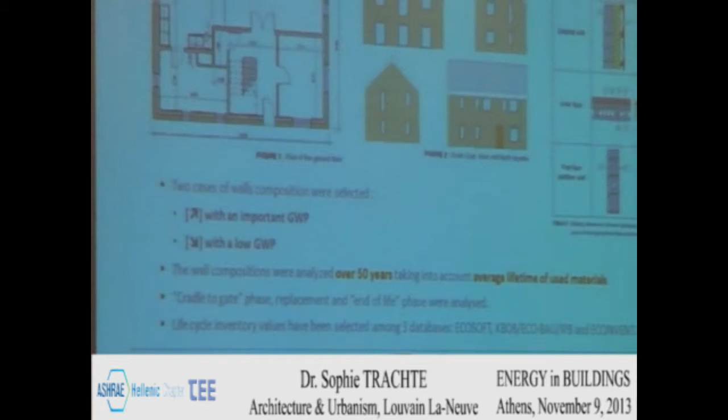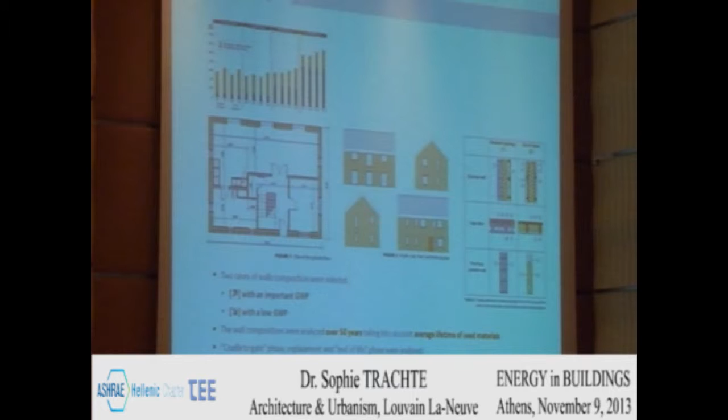So I would like to explain a little bit the graph on the slide. This is the hypothesis: it's just a small study for a single family house with different cases, different typologies, massive typology and wood frame typology, and we try to change different materials in the composition of the wall. So there are 4 different energy performance levels, and you could say directly that when we improve the energy performance of the building, we decrease the energy demand.

But we compare, in the red color, this is the gray energy needed by the building materials to build the house, and in gray it's the operational energy, the energy needed for heating. So we could see that for a low energy standard, gray energy is almost the same as the operational energy, but for a more performant or more efficient standard, the gray energy becomes very important.

So when, as designers, architects or engineers, we work on energy efficiency, it's also important to think about gray energy in building materials and try to decrease this energy consumption.

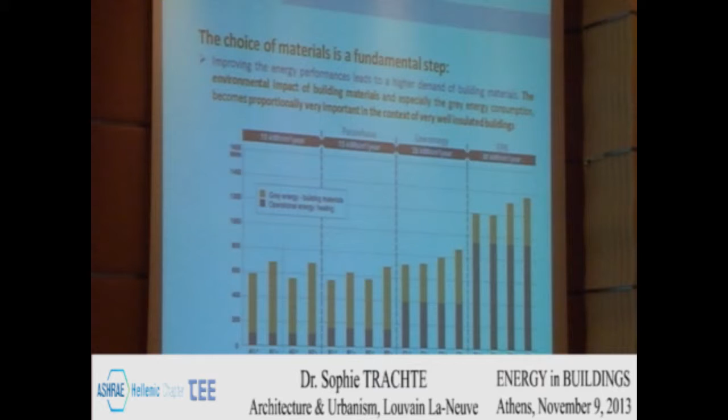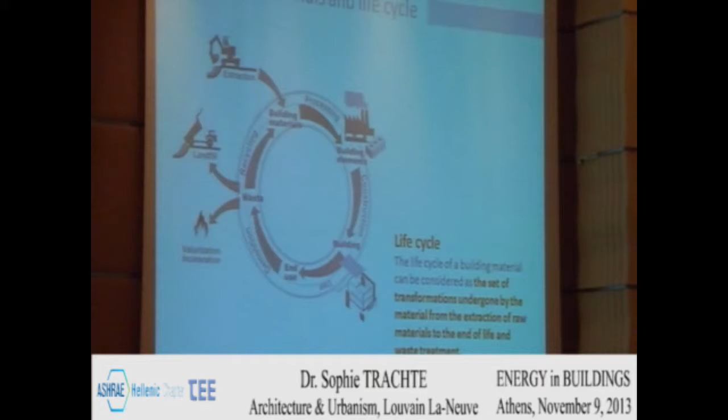When we speak about building materials and gray energy consumption, it's important to focus on the life cycle of building materials or life cycles of building. Life cycle could be defined as a set of all the transformations undergone by the material from the extraction of raw material to the end of life and waste treatment. In general, we present the life cycle as a circle, but we could also present this as a line with the different steps: extraction, production, building site, use of the building, and then the end of life or the refurbishment step.

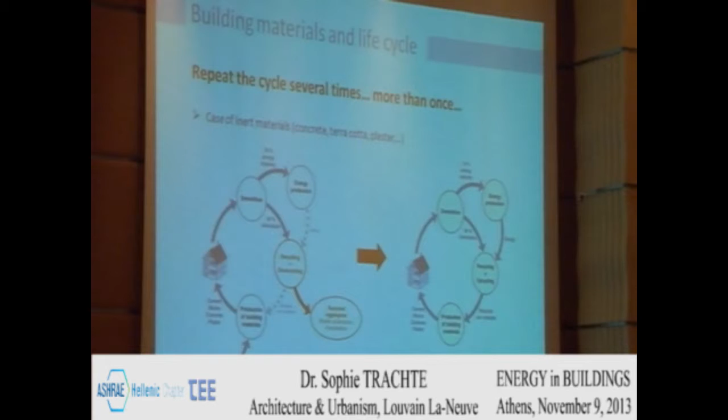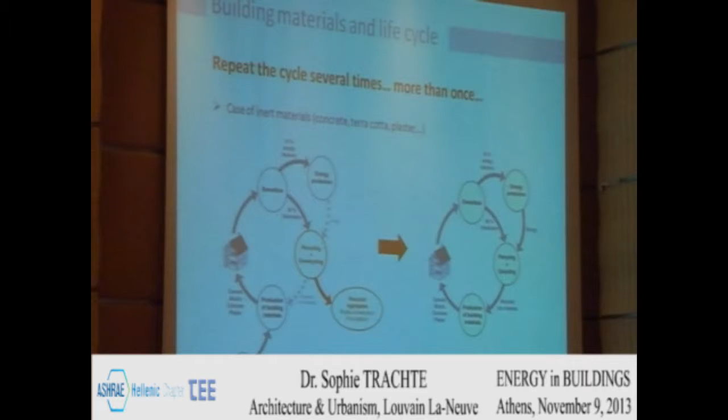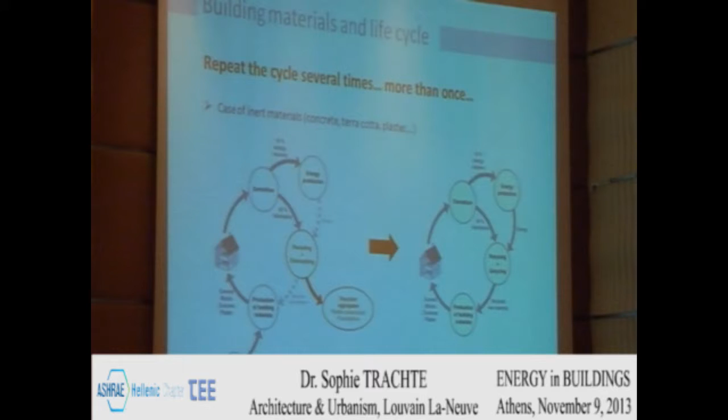Why present life cycle as a cycle? Because the objective is to repeat the cycle several times, more than once. To explain that, I present a small case for concrete waste. In most European countries, concrete waste is only crushed and then used for road construction and foundation, but we don't use the real potential of the materials. In Switzerland, however, they use the real potential of concrete granulate and recycled granulate to produce new concrete, and this is a good solution for building waste.

In the life cycle, each transformation of materials consumes energy, especially fossil energy, and so each step could pollute the environment - the air, the water, and so on.

So we could now define gray energy. Gray energy is the energy required by the transformations undergone by a product throughout its life cycle. So when we speak about gray energy, we consider all the life cycle of the building materials. Gray energy is always calculated in primary energy and into 4 types of energy. On one hand, we have renewable energy and non-renewable energy, and then we make a difference between the energy that is in the material, like wood - wood has a high potential of energy in its material - and we focus also on energy needed by the process.

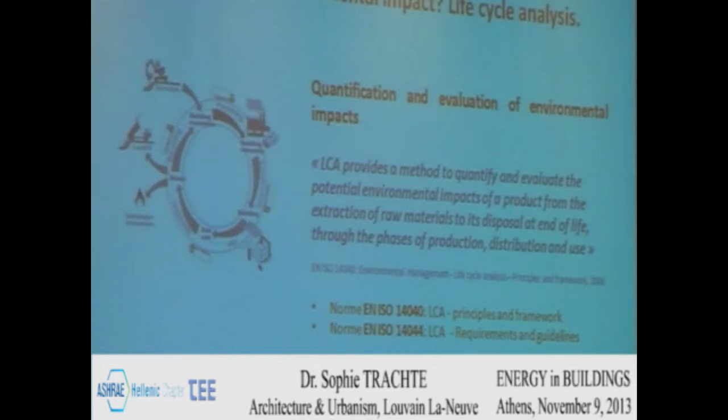So how do we evaluate the environmental impact throughout the life cycle? By a life cycle analysis. The first life cycle analysis was done by the Coca-Cola company in the 70s, and we had to wait until 2006 to have a standard that regulates this type of analysis.

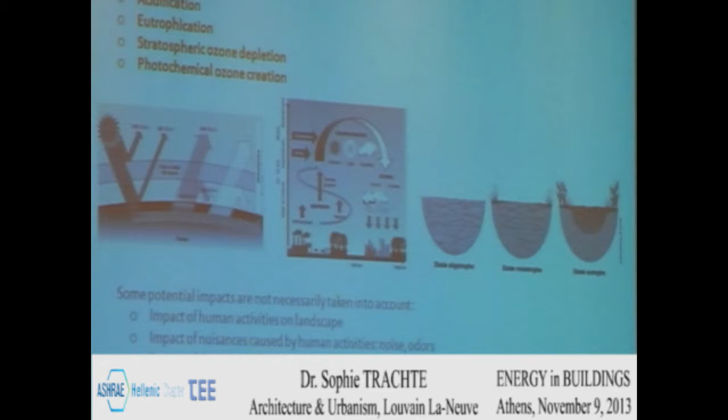I don't want to go deeper into life cycle analysis because it's a complex study, I'll just give some information. The environmental impacts that must be covered are natural resource depletion, global warming, acidification, eutrophication, stratospheric ozone depletion, and photochemical ozone creation. What's important to know is that the limits of the study could be different.

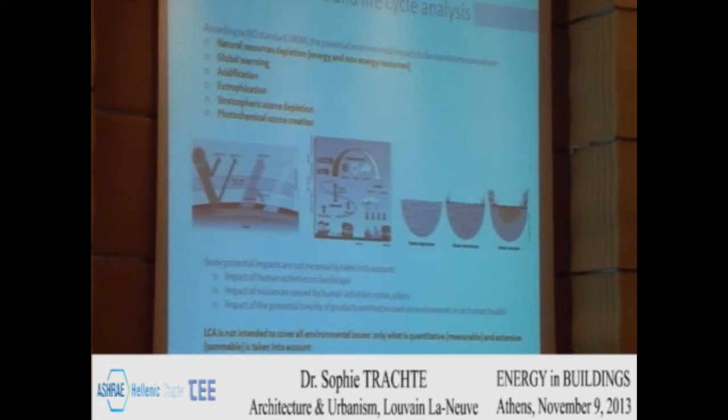We could have a life cycle analysis called cradle to gate, where we just focus on extraction, transport between extraction and production, and production itself—so just a small part of the life cycle. Or we could have an analysis called cradle to grave, focusing on the whole life cycle.

Another important thing: life cycle analysis does not cover all environmental issues. Only what is quantitative and extensive is taken into account. So today there are some environmental impacts or issues that are not covered and not studied by this type of analysis.

Life cycle analysis is not really a practical tool for designers, architects, or engineers. I will now try to present some tools that you could use in your professional practice.

First of all, the environmental product declaration, or EPD. It's very similar to a life cycle analysis. It's not really a tool for designers, but as a designer you will be confronted by manufacturers, and a lot of manufacturers will present you with some type of EPD.

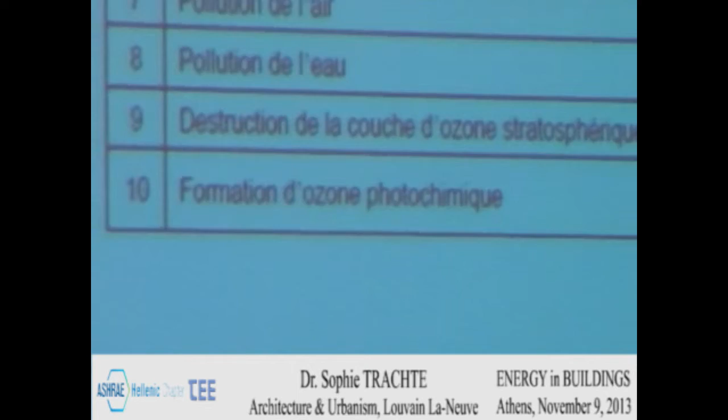Other tools are more useful for designers. I'll present them as a checklist: the Green Guide, English tools, the Swiss tools, Dutch tools, and the last one, the Baubook, an Austrian tool. It's very interesting if you also focus on energy efficient and passive buildings.

We could also use software to perform life cycle analysis for building materials, walls, or whole building systems. For me, the best one is EcoSoft, also an Austrian software. The two Swiss software tools are also very interesting, especially for the design phase of the building. There are French tools too.

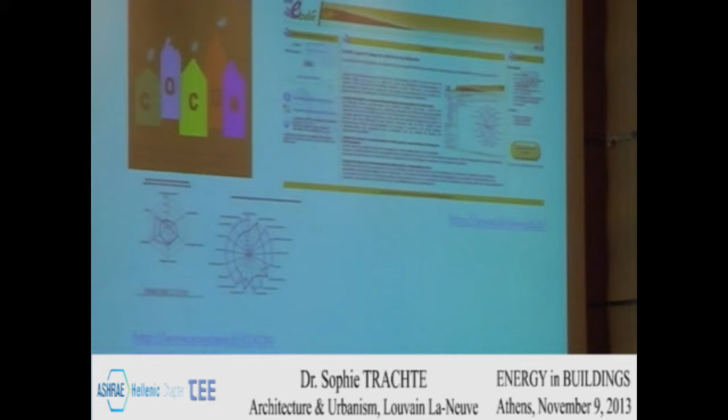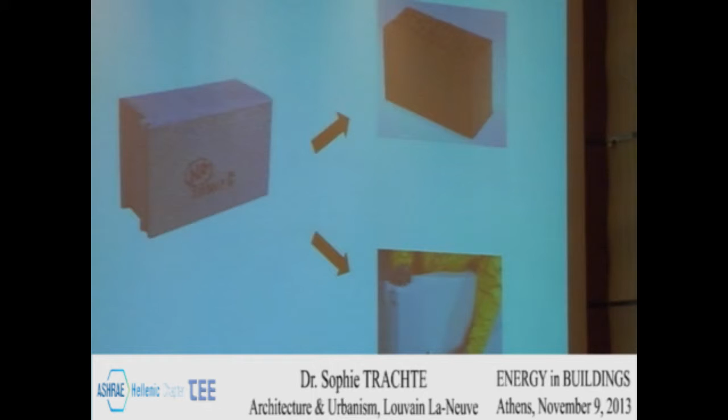To conclude my presentation, I would like to present some comparisons between walls and between different materials. First of all, a comparison between blocks: concrete blocks, terracotta, and cellular concrete, which is more and more used in Belgium and other European countries.

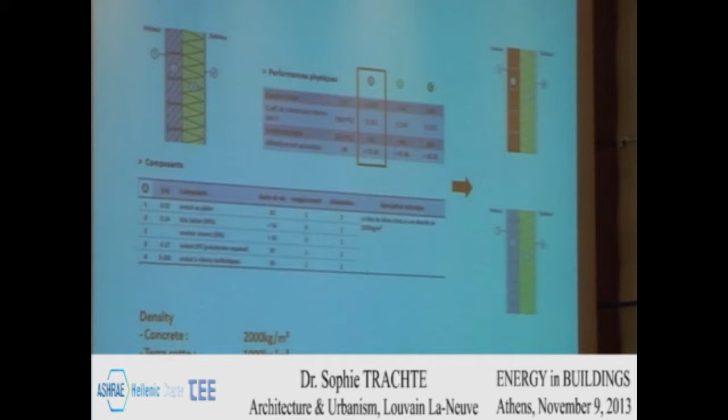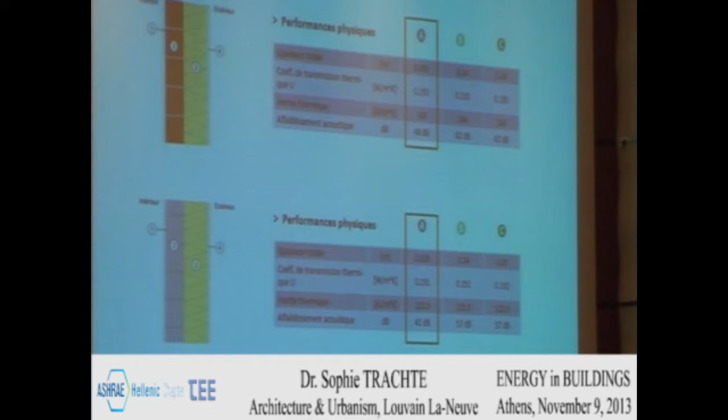How do we compare them? We compare those three blocks with the same performance, but different density, and we can see that the density of building material has an influence. This is the performance for the terracotta and the cellular concrete: thickness, thermal transmission, thermal inertia, and also acoustic performance.

We made a study over 50 years, considering the production process, replacement if needed, and elimination. The results are given only for the blocks, not the whole wall, because the other materials are the same in the three cases. You have different environmental impacts shown; I'll focus on gray energy.

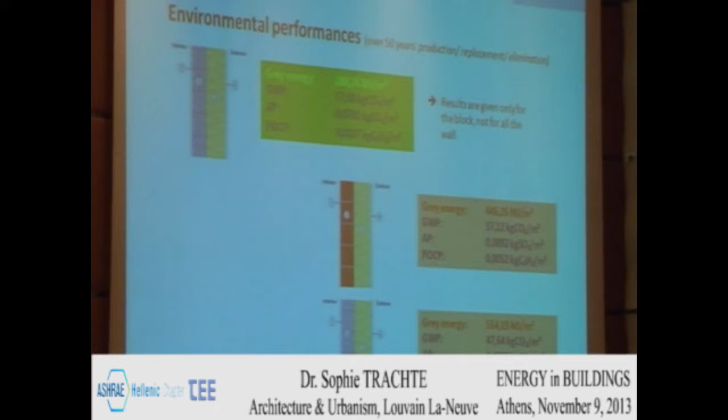Gray energy is important, but there are also other environmental impacts, and for some of these we made qualitative comparisons too. This is for resource depletion: the red color is a bad result, and the green picture is a very good result.

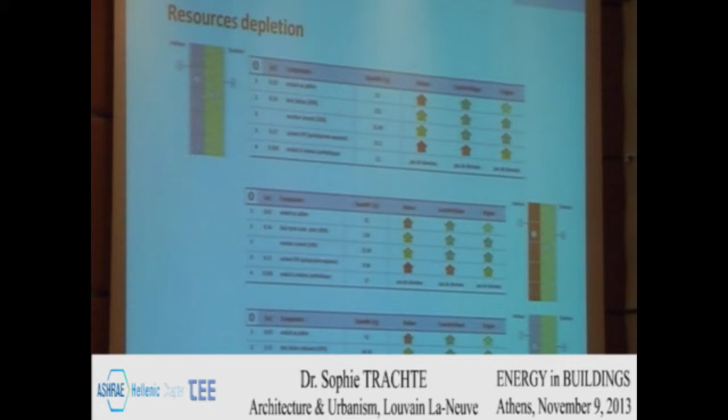We made the same study for recycling potential, and it's clear that in European countries we recycle a lot of inert material, inert waste, like concrete and terracotta. We crush it to make granulates, and we use a lot of those granulates, so the result is very interesting for recycling potential.

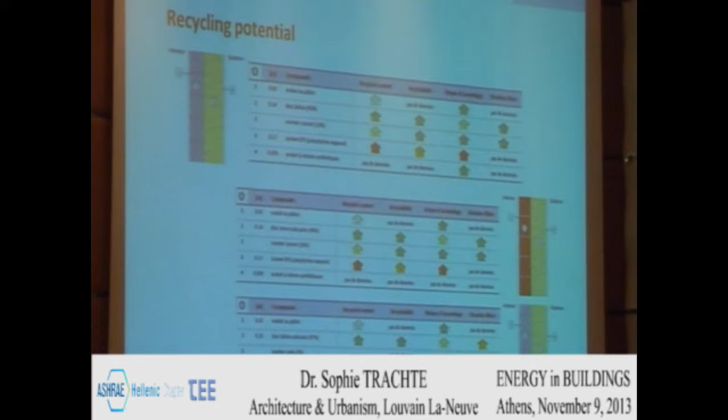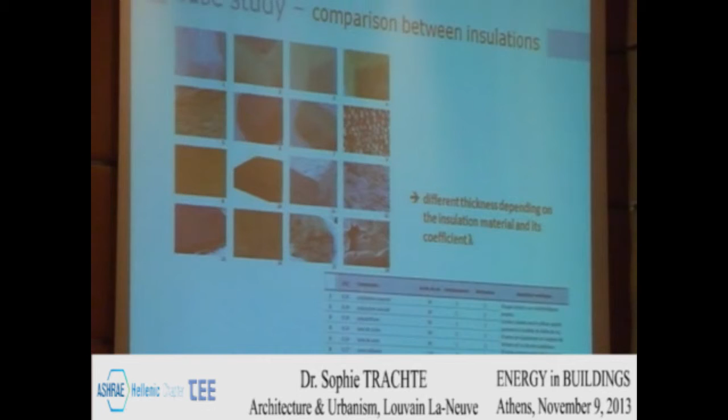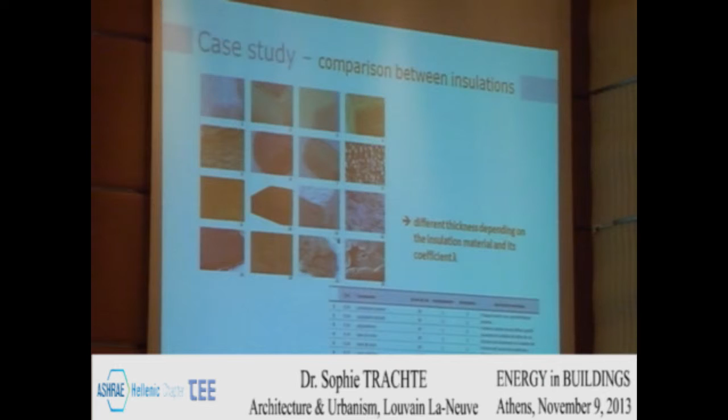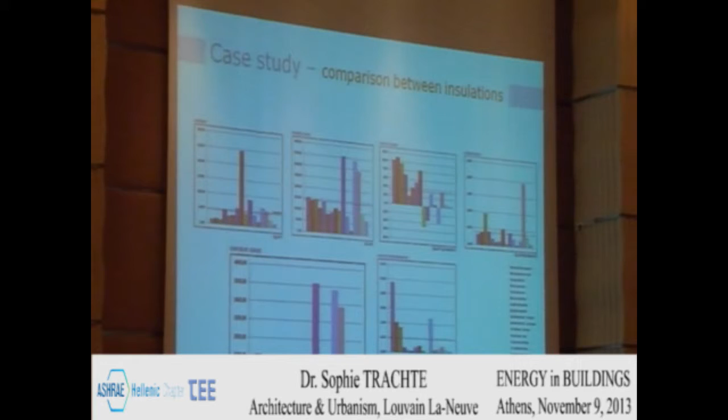Another comparison, just for insulation: we compare 16 different insulation materials, but with different thicknesses to have the same performance. And this is also the result over 50 years. We consider production, replacement if it's needed, and elimination. And you could see that there is a lot of difference between insulation materials, but also that it is not really easy to find the best one because there are a lot of different criteria.

Ms. Trachte, you have 5 more minutes. Okay.

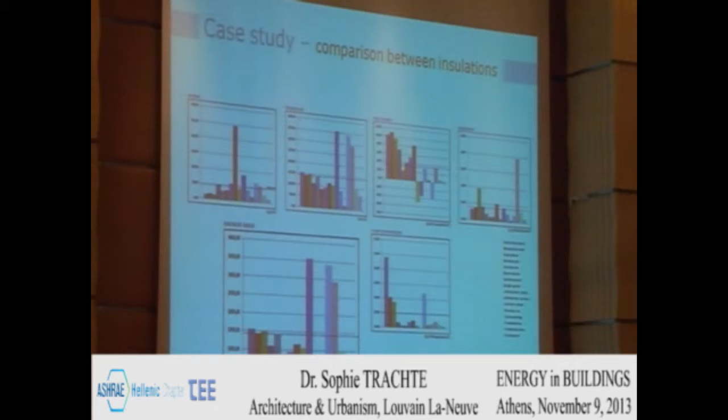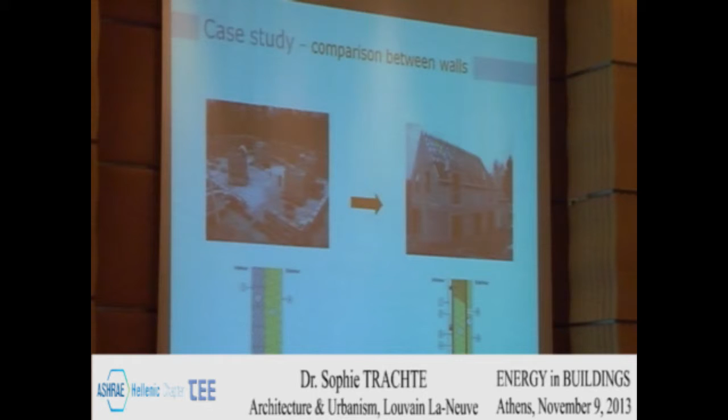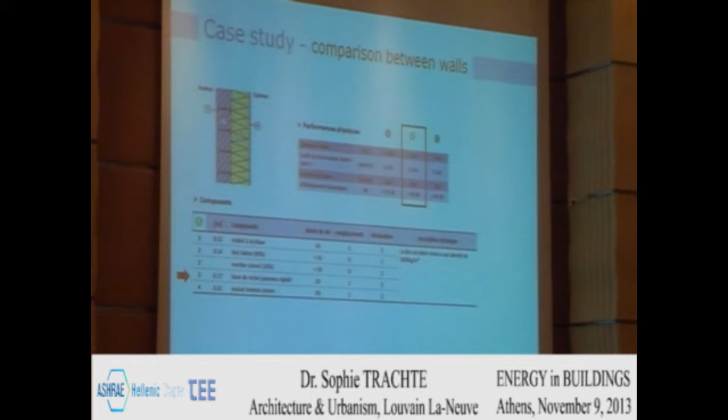We could also compare different walls and different typologies of wall. A traditional typology in the Belgian sector, and another typology in wood frame. We compare those 2 walls with the same performance. It's very important to compare with the same performance. And it's important that in the wall there are not so many different building materials, so it's important to think about that for the elimination and for the waste treatment. Here there are a lot of different materials.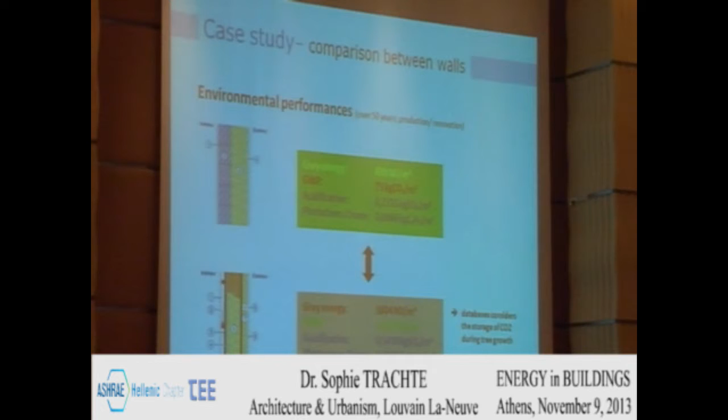Gray energy in the wood frame is very important. Why? Because for this type of structure and typology, we use a lot of wood panels, and those wood panels have a high demand of energy during the production process. But the idea with wood is that this wood is a storage of CO2, so the global warming potential is very, very small. The same study for resource depletion, a qualitative study, and for the recycling potential too.

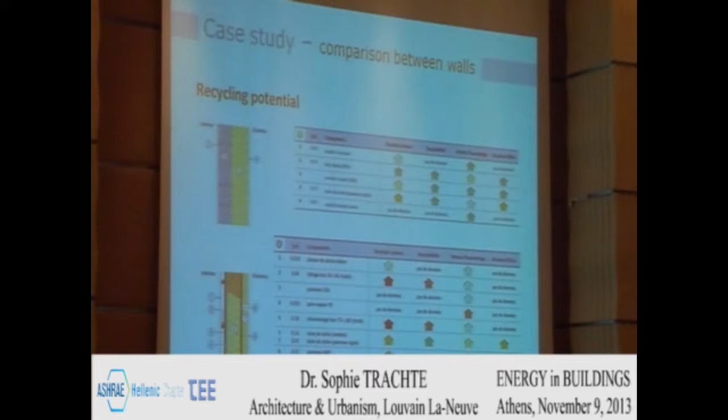So my conclusion for today about building materials and gray energy consumption, I think it's also the same for operational energy in use. First of all, we have to rationalize and optimize the use of building materials, like for energy. And I propose some guidelines: align the building process and the lifetime of the building. It's very important. Choose building processes that allow adaptability and evolvability, so that the building could respond to the use of today and to the use of the future.

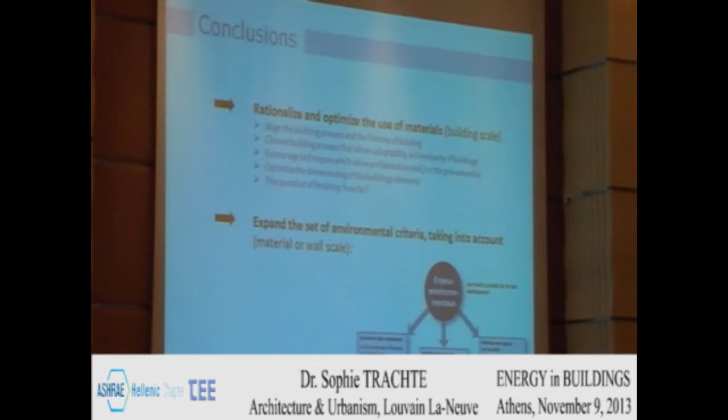Encourage techniques which allow prefabrication or pre-assembly. It's important to reduce waste on building sites, and when we don't have waste on the building site, we don't have to manage it. Optimize the dimensioning of the building elements, and a big question, the question of finishing. How far is painting necessary in any case? Could the concrete be present in a building? This kind of question is important.

And then we could expand the set of environmental criteria, take the gray energy criteria, but also other environmental impacts. And we could have this type of analysis for just materials, but also for the whole building or all the walls and components in the building. So expand the set: saving resources, reducing environmental risk, and reducing health risk for workers and occupants.

So, in my opinion, two criteria are very important today. It's clear that energy is a big issue, but for me, a building is built for users, and the health impact is very important in buildings. And the second one, because we use a lot of resources and we have just one planet, we have to think about waste in buildings and to consider this waste not as waste, but as a new raw material with a high potential for the building sector and valorization.

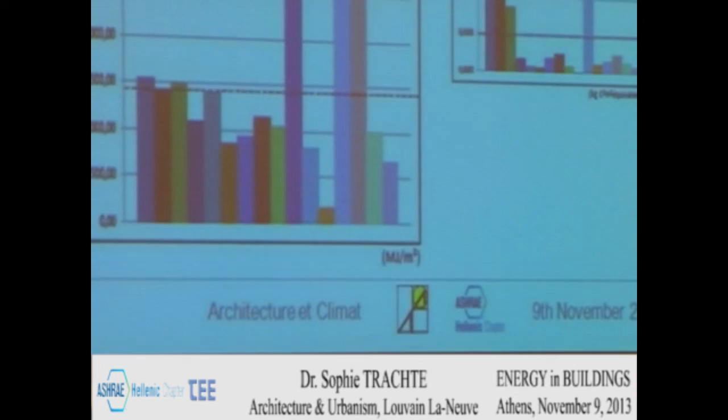There is, I think this is wood fiber, because the density of insulation material has an influence on the environmental impact, because environmental impact, grey energy, global warming potential, and so on, is calculated per kilo. So if the insulation material has a high density, the environmental impact is higher than another one. But if you are interested in it, I could send you the study.